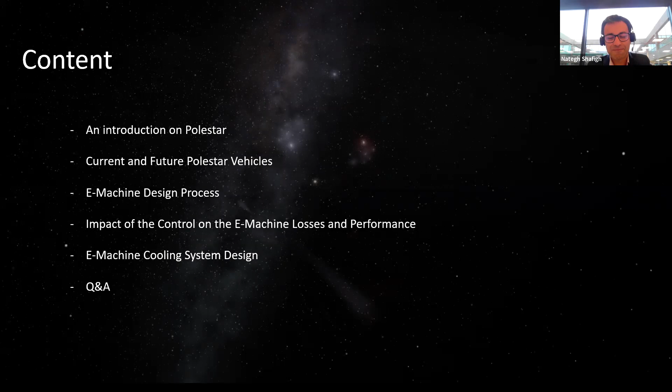About Polestar, we are an electric performance car company. We are a spin-off from Volvo, and we are still owned almost 50% by Volvo Cars, and also a big part by the Geely Group, which owns a big part of Volvo. So we have a big heritage from Volvo Cars, of course, but we have also our own way of thinking when it comes to the design of the components, including the electrical machine.

And one very important target that we have is to not make compromises in our design process when it comes to different vehicles. So each vehicle we are looking at, we consider it as a unique vehicle, and we try to have a customized design for that vehicle that results in no compromise in the attributes of that specific vehicle. So that enforces a lot of requirements on our tools and design processes.

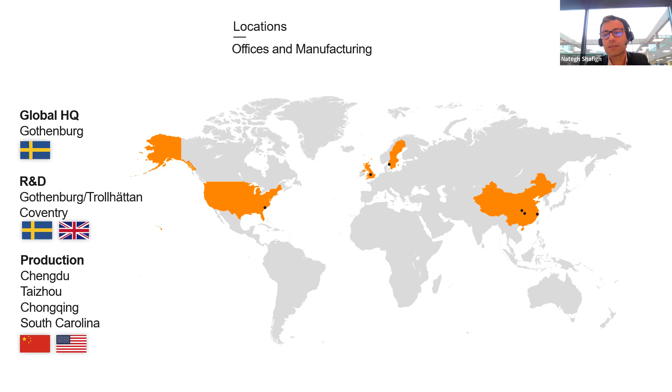Now I'm actually presenting from our headquarter office in Gothenburg in Sweden. We have also another R&D office in Coventry in UK as well, which focuses more on the car body. We have production basically in China and South Carolina in US.

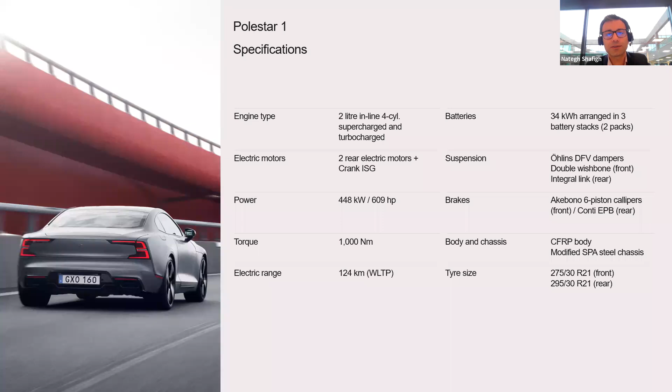On our vehicles, we started with Polestar 1, which was a hybrid vehicle. We are not producing that anymore because we are moving to a full electric brand, basically. This was a nice, beautiful car, quite high performance, as you can see from the numbers here, both in combustion engine and also in 2 rear electric motors that we have.

Our most sold vehicle and the product that we are selling today is Polestar 2. It comes in 3 basically different variants: standard range, long range single motor, and also all-wheel drive, where it is powered by 2 different motors. And for now, we are reaching quite good acceleration numbers for 0 to 100. With all-wheel drive, we can reach almost 4.7 seconds, and we are going to improve that in our next vehicle. You will see in the next slide.

So something about future. Our next car is Polestar 3. It's a huge SUV, beautiful car. And this is gonna be announced in a couple of weeks, and you will see it on the road from basically next year.

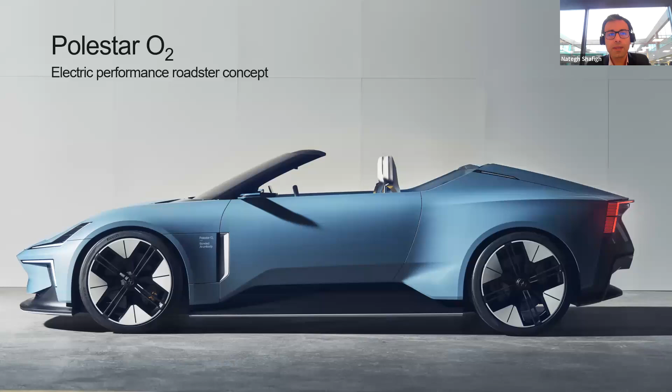Our signature car will come to the market in 2024, 2025. It's called Polestar Precept. It's a beautiful sedan, quite big one as well. And you will hear later on its impressive performance, 0 to 100 with not so many seconds, I can say. I cannot really release at this point our acceleration, but it's gonna be impressive and it's gonna be far better than Polestar 2. And this is another vehicle that we have, a Roadster.

So the reason that I showed you these variants: we are not selling today so many cars, and in 2024, 2025, we are still going to produce maybe 290, 300,000 vehicles. That's at least our target. But for this volume that we have, we still have quite high variants of the vehicles. And since we need to design for each of these vehicles specifically, we need a fast and effective design process for all our components, including electrical machines.

That means that we need to cover a wide range of rotor topology in our design process. We need to cover different winding configurations. It can be hairpin, it can be random wound in one motor, depending on the volume. Because as you know, depending on the number of vehicles we produce, we can decide if there is a good business case behind the hairpin winding or not, or we should continue, for example, with the random winding. The same with the rotor topology: the efficiency target and the sustainability target that we have enforce the kind of rotor topology that we use.

So addressing all these requirements with one design process, but for different vehicles, has so far ended up in a design process that can find a good compromise for each vehicle between performance, which is our main target because we are an electric performance car, range and efficiency, which of course is super important, sustainability, which you will hear more about in future, and also cost. But we are not the cheapest brand in the market. So maybe we can make some compromise on the cost in comparison to performance, efficiency, and sustainability.

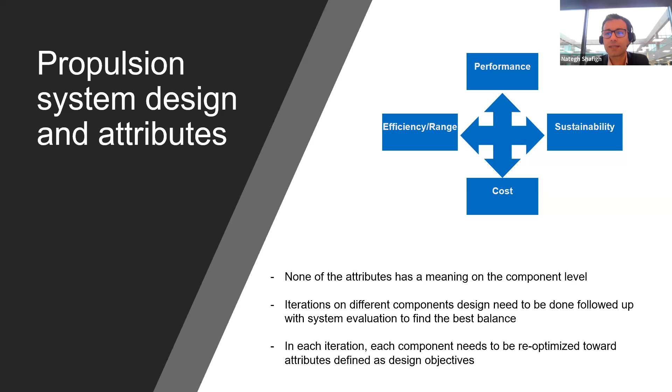Then we do some initial dimensioning of the e-motor, inverter, and transmission to find the best combination of these three components when it comes to the current rating of the inverter, the size of the motor, and the gear ratio of the transmission system. After initial dimensioning, we go to the component design. And my focus today is on the electrical machine concept design.

And that's where we used the built-in process in JMAG, which is based on the genetic algorithm. We make several, normally, concept designs. We put it on the system studies. We have a tool, we call it internally VSIM, that basically models the whole propulsion system. And then we will see with that specific motor model, are we able to meet our performance requirement, our range requirement for different vehicle segments under each vehicle program, basically.

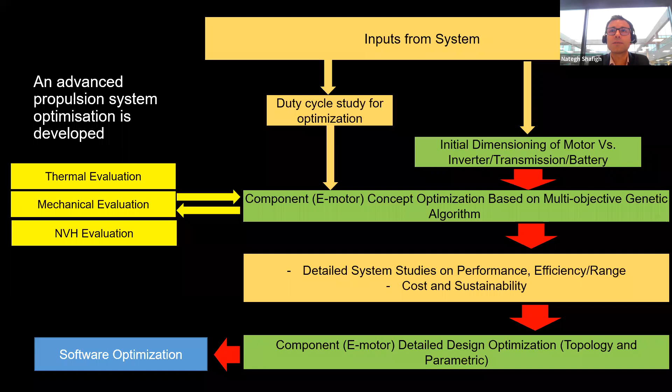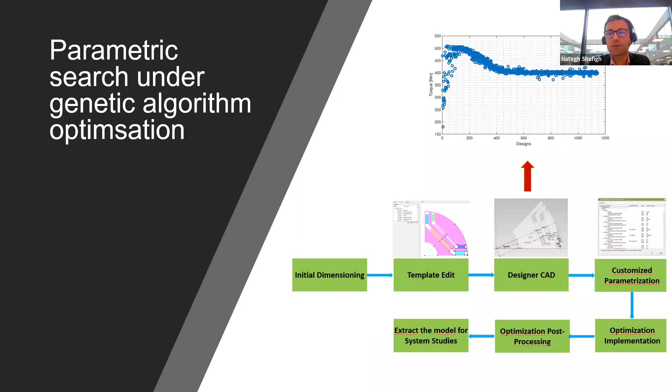Yes, the methodology that we have for optimization of the components is based on a genetic algorithm. This is a built-in function. If you have used JMAG, you should know about it. And in summary, basically, we start from initial dimensioning. We go to making the template. This is an example of a double layer U-shape. We will make the template parameterized in the way that we want. We add parameters, we remove parameters, we go to the optimization process, we find the best design that addresses our need, basically. And this is on the parametric side.

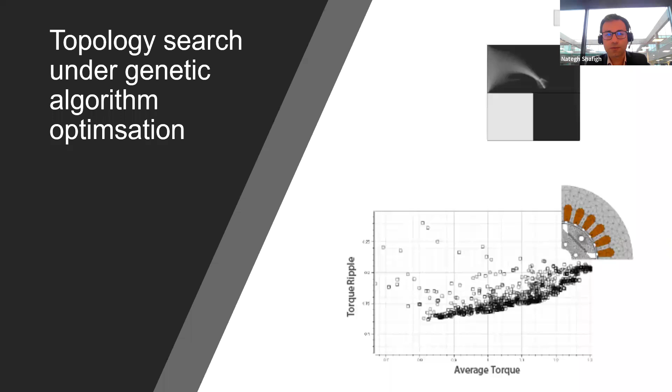And then, as I said, we will use also a genetic algorithm, the same optimization methodology, but this time not for parametric optimization, but more for topology optimization, where we focus on small changes in the rotor barrier toward NVH, improving the efficiency. This is an example of the optimization that we have done. And in this case, we were targeting the sustainability, and we were trying to use, instead of copper hairpin, aluminum hairpin to improve the sustainability aspect of our product. You can find the full report of this study in the paper presented in ICEM a couple of weeks ago.

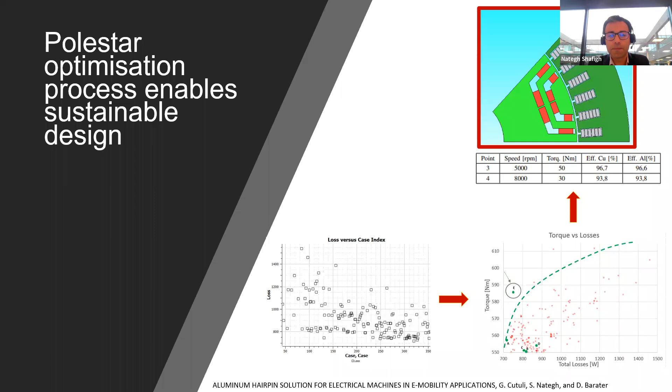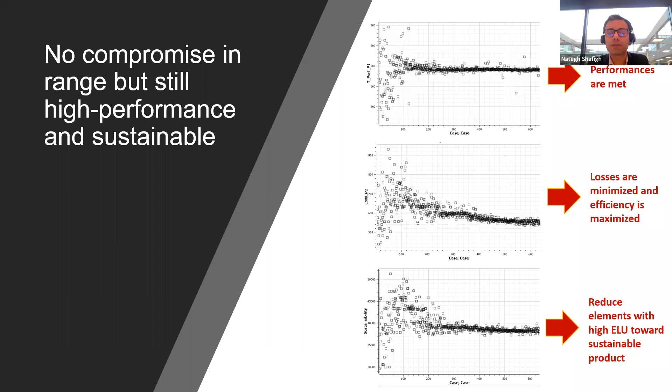And as you can see, this process basically enables us to achieve the level of performance we want, the level of efficiency we are looking for, and also the level of sustainability we are looking for, where here we are talking about ELU, environmental load unit, as a parameter to evaluate the level of sustainability of the product, basically.

Yes, but as I mentioned, our optimization is not limited to the motor itself. So in order to have maximum utilization of our hardware, it is important to have also good software supporting the hardware, both on the vehicle level and on the component level. And the software for the motor basically means the control.

So after initial dimensioning, doing concept design, but before finalizing the concept design, normally we involve also some control optimization, where we really take advantage of the very wide selection and freedom that we have in the circuit of JMAG Designer, where we are able to have at least some simple PWM control, where we can change the switching frequency, we can change the DC link voltage, and see its impact on the motor performance and the losses. Of course, this kind of simulation can be time consuming, especially in the first transient.

And in order to address this challenge, we are using JMAG RT, where we run the transient part on the analytical, lookup table based RT solution. And then after reaching the steady state, we shift the motor supply from RT to the inverters, where we see all the switching effects and their impact on the losses and the motor performance. So this is also one operational function that we have, and we are using it to optimize the switching frequency, maybe to study the impact of the level of DC link voltage on the motor performance and the system power.

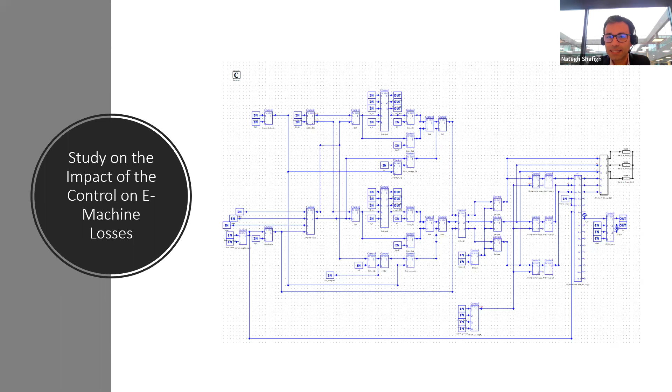The other add-on that we have made in comparison to last year, and it's working pretty fine, but we still have some challenges, and I will mention that, is using Particle Works to do the concept design of especially direct oil-cooled electrical machines.

As you know, when we move from random winding to hairpin, we end up in a structure with very small distances between the solid parts. These small distances, if you use conventional CFD simulations, end up in pretty high resolution, a high number of elements around that region, but they also influence the size and the number of elements used in the neighborhood of that region, especially when it comes to the hairpin winding, as I mentioned before.

That is why we decided to move to Particle Works, which is a solution based on particles, and the element size is the particle size, not the shape and the resolution of the solid parts in the structure of the motor. Using this method, we are able to run transient simulations in quite good time. The latest numbers that I had from my colleagues were 3-4 hours for a simulation of 10 seconds for a not very small motor, but of course on the cluster together with a pretty strong GPU.

This is the slide that was provided by one of my colleagues, and it shows our process for doing the flow simulation in Particle Works. We start with the CAD import, physics settings, inlet settings, and then we still need a big post-processing in Particle Works to get the results that we want. The outcome of this kind of simulation is flow distribution and heat transfer coefficient, which are the parameters that you need to finalize your concept design.

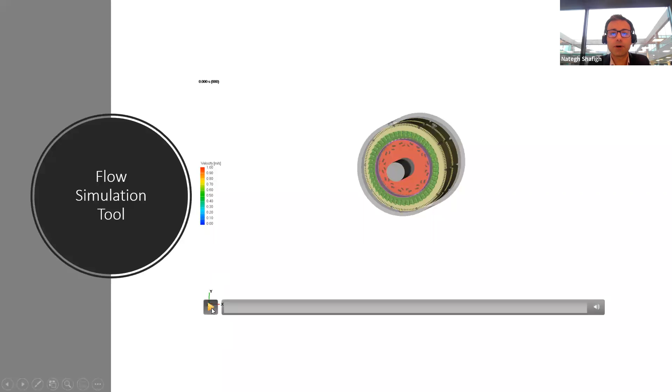This is a video of the kind of simulation and solution that I mentioned, that if you have a good GPU, a good cluster, and Corentin has arranged a good license configuration for you, you can run it in 2 to 4 hours, depending on the size of the particles, where you can see how, for example, the two inlets here in this cooling configuration are filling up the ducts, and then the oil will be collected at the bottom of the machine, and that's where you have the outlet.

This is not the cooling system that we are using or are going to use in future. It was just an example to show you how you can use this simulation tool to better understand if you have a uniform distribution of the oil, if you have been able to fill up all your axial ducts or not, and that's where you do the optimization.

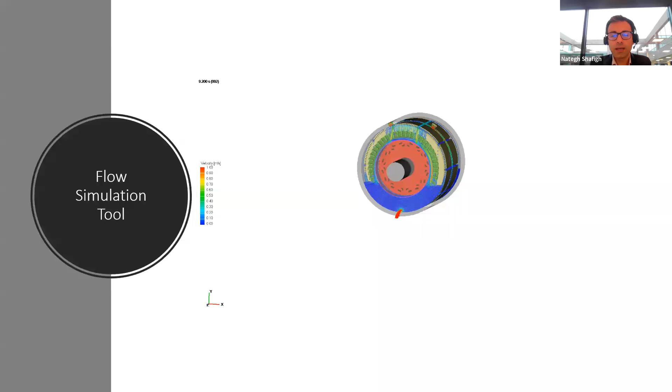But when it comes to this software, we still have some challenges, to be very honest with you, that I think will be addressed in the next versions of Particle Works. These are mostly the need for a lot of post-processing to get the results at the level that you want. For example, to get the heat transfer coefficient, you need to run some specific codes to get the data in the format that you want, so you can compare with the other concepts. We are really hoping that this issue will be solved.

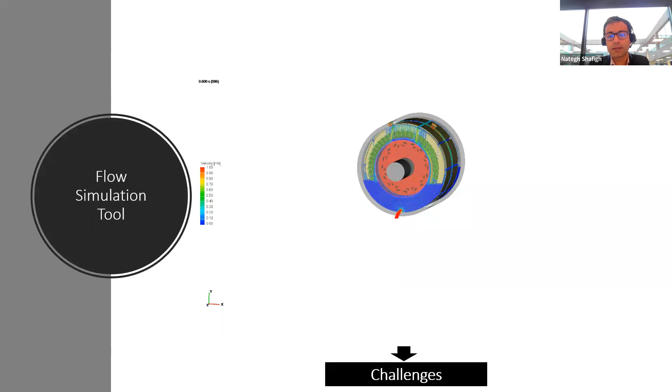The other challenge that we have is the link between JMAG and Particle Works in terms of the CADs, which we think needs to be improved, because today there is no direct or easy link to be used. So there is a need for some other software to come in just to export the CAD between these two software. This means that there is no direct link between the electromagnetic design and the thermal design. So the CAD and the post-processing of the data are, I would say, the challenges, and there is room for improvement.

Hello, thank you for your nice presentation. Xavier Robin from Hexagon. At the very beginning of your presentation, you showed that you have maximum 1, 2, 3 car models. So I guess behind that you have only 1, 2, or 3 types of motors. The type of simulation and process you have shown, are you doing it continuously with research on new designs, new types of motor topology for the future? Or do you do it once for one car and then stop, maybe three months of work, and then come back 2 years later for a new design? Or is it continuous improvement?

It was a very good question, actually. One thing I would like to mention is that under each of these vehicles, we have different power positions as well. You don't really have low power, but maybe medium power, high power, and X power; we call it XP, HP, and MP. So under each of these vehicles, there are 2 or 3 different variants of the propulsion system hidden.

So this is one thing that makes a high number of variants. Of course, we do our best to find modularity to reduce this number of variants, which is beneficial for our production, our quality check, our development cost, everything. But we don't force modularity so much that it will influence our vehicle. So that was about the number of variants we are working on.